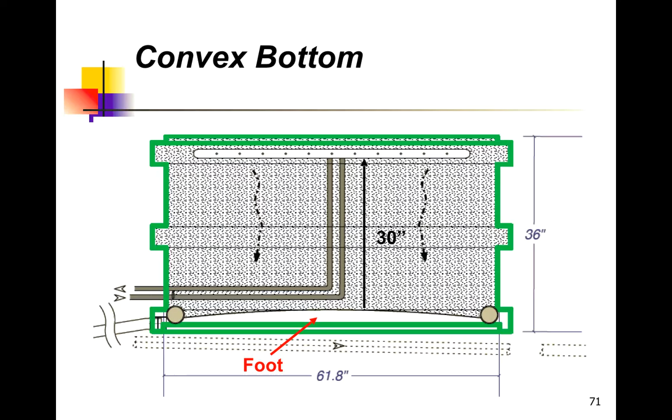Our plumbing will come in near the bottom. Our supply and flush line will come in near the bottom and then go vertical up through the center. It'll be filled with media with our low flow coil on top, and then it'll also be covered with media. The steps to do that is we're going to use a basin and a foot.

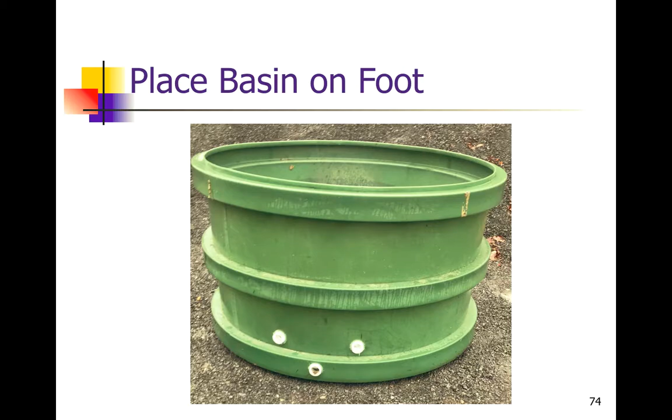We dig an excavation, again, at least 2 inches higher than our tank adapter elevation. We'll put this foot on the ground and place the basin right on top of it. And what you'll notice inside is you will now have a very slight convex shape or a dome shape inside the middle of the basin.

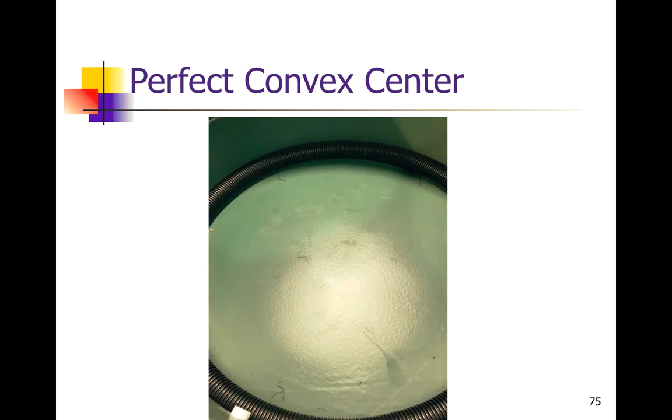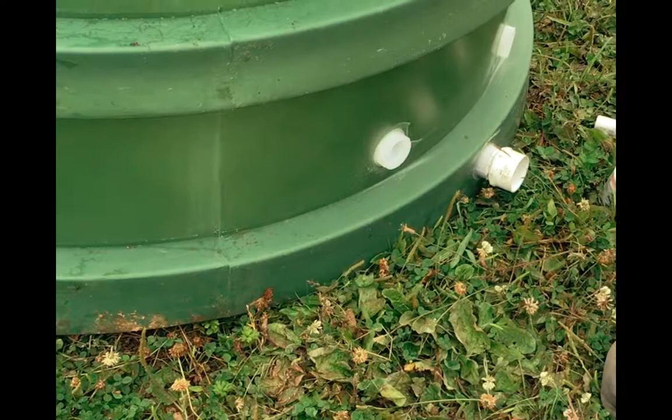Next, we want to install, we have 3 tank adapters, a 1.5 by 2-inch male adapter, and then 2 other specialty fittings that we provide in the kit. Use Teflon tape or pipe dope. Do not use any tools, just use hand strength to attach these adapters. And again, always go from the outside in.

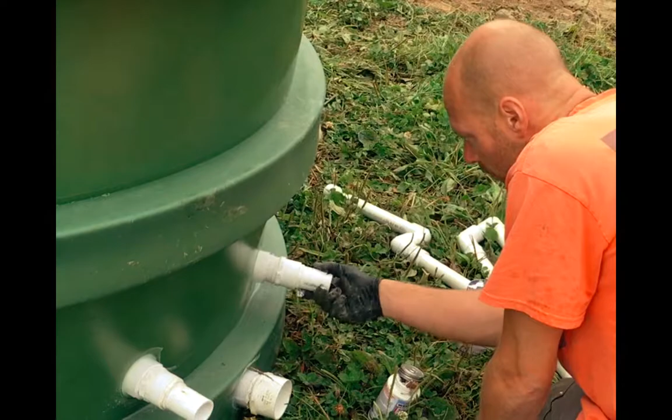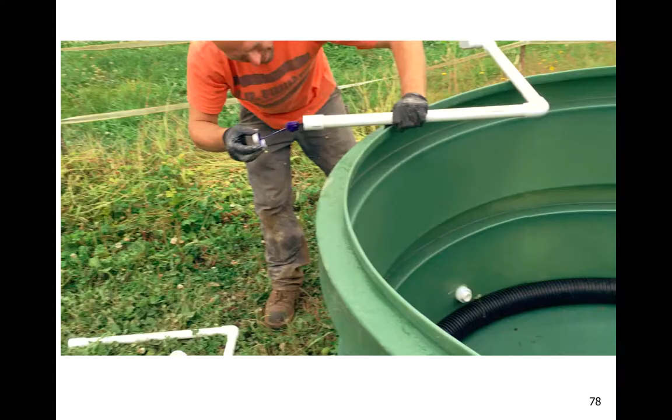And you want to tighten these as far as you can by hand. It'll almost always seat, or there might be just a little bit of gap between the stop and the 2 fittings. And on the inside, you'll see that it's sticking through. We want to glue the plumbing that we've provided with the kit. There'll be 2 what I call internal plumbing pieces.

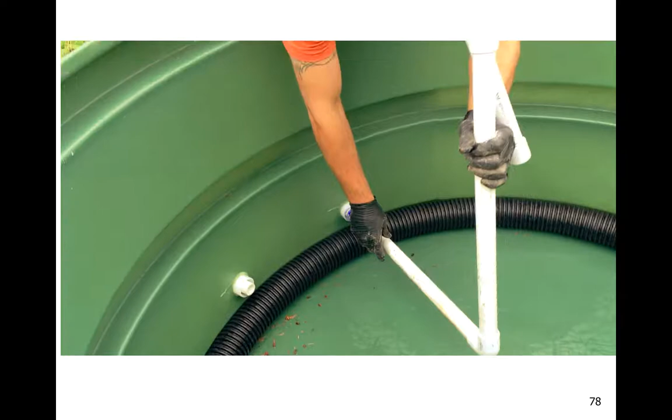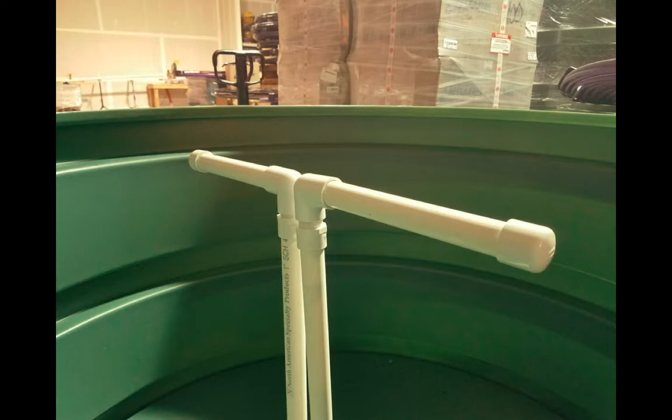And when you get these put in place, they're just kind of going to dangle there in the air, and that's fine. Just don't worry about doing any adjustments at this point. We do have a new version where the top pieces are going to look like this. We call them the arms, the horizontal pieces. They're 1-inch pipe that are about 12 inches long. They're dry fitted into the elbow, and the caps are dry fitted.

And these are put in place so that when we put the grow stone or the media into the basin, we don't get any material in the plumbing. So all you have to do is just leave these in the horizontal position as you see them here. And then the grow stone has a pour spout or a dump spout on the very bottom. And you want to place the media on the back side of the basin, not directly on top of the plumbing, but just let it run on the floor and let gravity take over, and just let it backfill around the tubing or the piping itself.

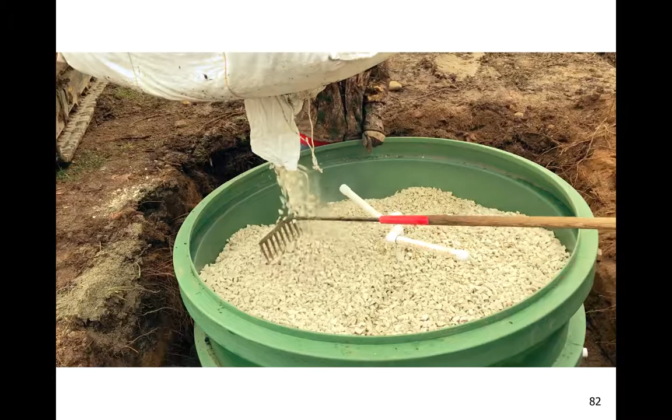The first bag will fill the tank about maybe 2/3 full. Just dump it out completely, level off roughly. The second bag we're going to have to do in lifts, where we're going to fill this basin to the bottom of the top rib, and we'll have to get that fairly level. And what it'll look like when we're done is it'll just be backfilled to the bottom of the top rib. And we want to try keeping any grow stone out of the top rib for right now.

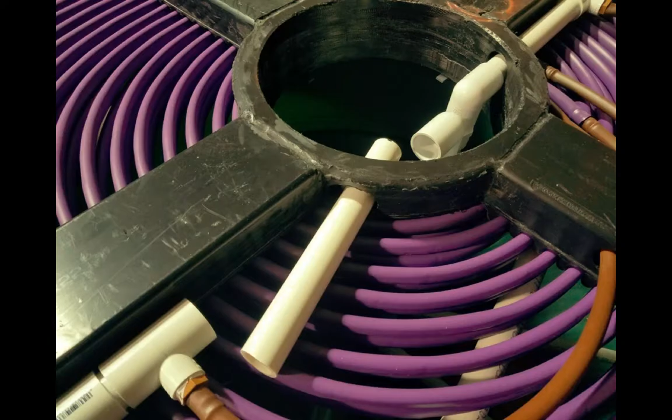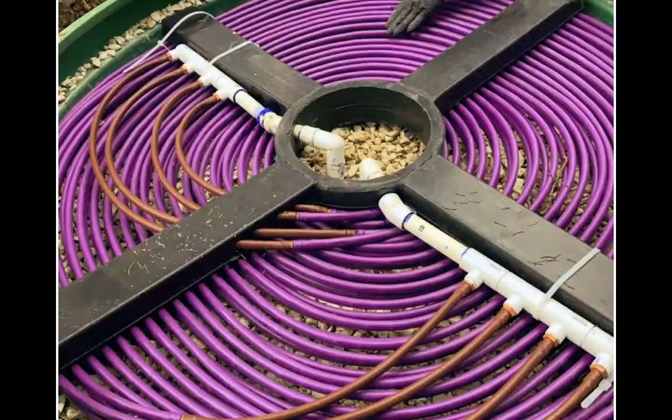We're going to have to remove the dry fitted arms out of the plumbing. We're going to put the bracket on top, and then we'll have to glue in the arms to the internal plumbing and then into the manifolds. Now you'll notice on these we zip tie the manifolds to the bracket. They do not have to stay zip tied when you do the installation. You can cut the zip ties off. Be careful not to disturb any of the tubing or slice it with a knife.

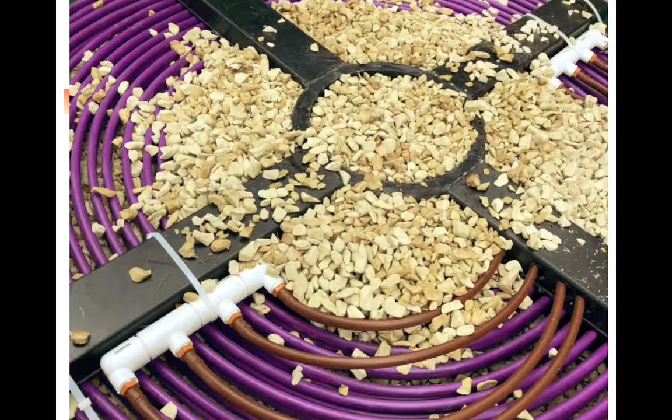And they can kind of come out at slight angles, but you should be able to glue your arms straight into your elbows and then into the manifolds, and everything will just lay real flat right on top of the tubing like this. Once the plumbing is glued and connected, we're going to want to fill in the gaps with some more grow stone, and just cover all the tubing with a shallow layer of grow stone.

Once we've got the coil completely covered, we're going to put the childproof mesh over the top. And you'll notice that we don't have any aggregates in the upper rib yet, because we're going to tuck this childproof mesh into the upper rib, and this is just meant to keep inadvertent access to a minimum. If a child wants to play on top of this thing and move some gravel around, they'll only be able to go down to the mesh.

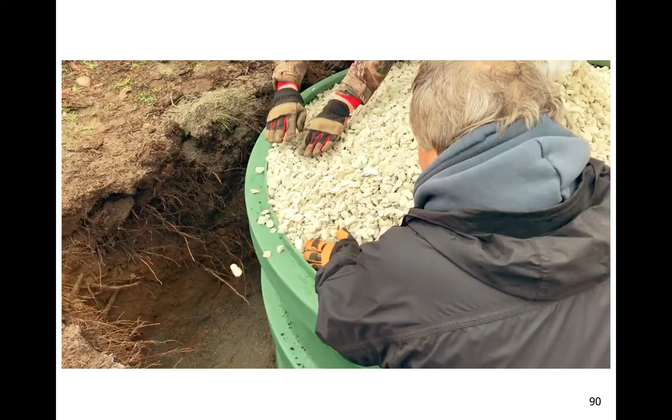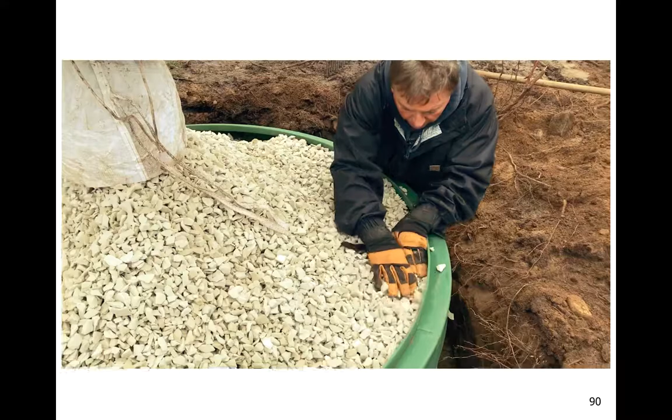They won't be able to physically touch the tubing. Although if we do need to get into the unit, the aggregate can be taken off and this mesh removed and replaced after any repairs are taken care of. So once the mesh is installed, we'll put a little bit more aggregate over the top. And it will be important that you hand pack the aggregates into the upper rib here to compact that mesh down.

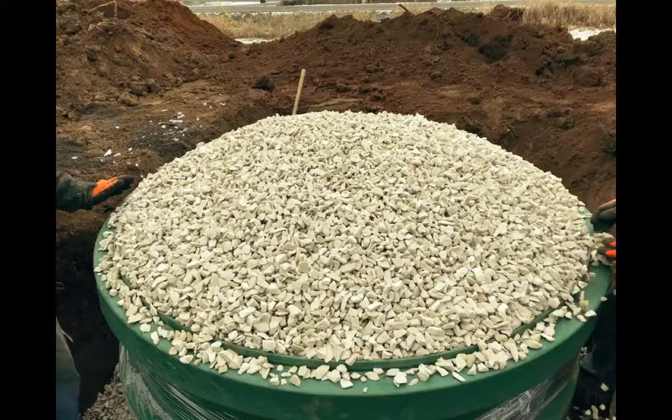And this aggregate will settle in. We've got these square ribs, and over the next week or two or three, this media will settle a little bit. So we want to make sure that we mound up extra media on top so that it's just there on site, and it'll always stay covered. And so when we're done, the unit looks basically like this.

The Growstone, the media, is recycled glass that's heated, air is injected into it, and once it cools, it creates a pumice stone. It has about an 87% void volume. The aggregate itself actually has pores that go all the way through, so we will get treatment not only on the surface of the media, but also in the internal portions of the media as well. Much better than just a standard rock type media.